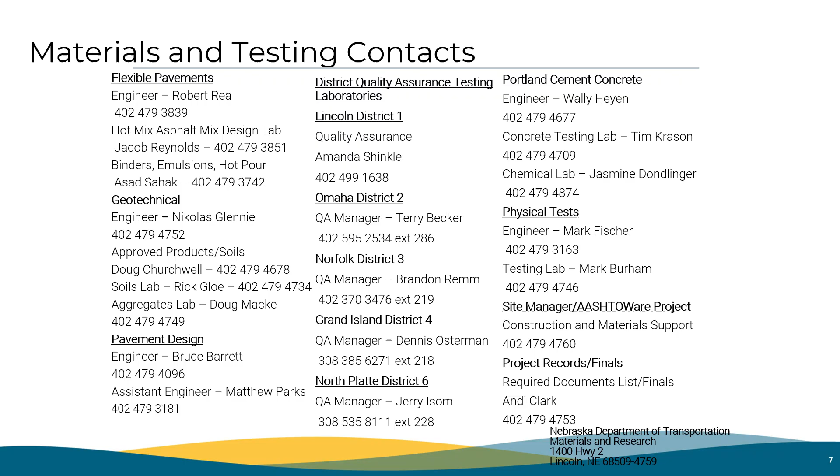Upon successful completion, you will receive NDOT certifications for binder and emulsion sampling and the Asphalt Field Technician 1 and 2.

Let's begin the Module 1 training, Intro to Materials, Tests, and Sampling.

Here we will go over specifications, plans, special provisions, and their hierarchy, lists, manuals, and locations of other supporting documentation, sampling, custody of samples, and sample identification.

This slide shows a set of plans in the middle, the standard spec book to the left, and the project contract special provisions to the right.

The hierarchy of these documents: the special provisions overrule the plans and standard specs, and the plans overrule the standard spec. You will reference this often, and it is a must to define, as there are sections that overlap in each, and must dictate how the contract is administered and interpreted.

If you cannot clarify a question or discrepancy, discuss with your district management through your project manager, district construction engineer or assistant district construction engineer, district engineer, then the construction office.

Now let's take a quick look at a set of plans. This is the title sheet that gives all the project location information. This is the North Platte East project. On this sheet you will find the project number, control number, the index of sheets, and the limits of the project.

The next set of sheets in the plans are called the typical cross sections. Let me blow up one of these sections so you can see it better. This is where you will see the designed build of the roadway sections. You will find information such as pavement thickness, milling depth, lane widths, shoulder widths, and much other vital information.

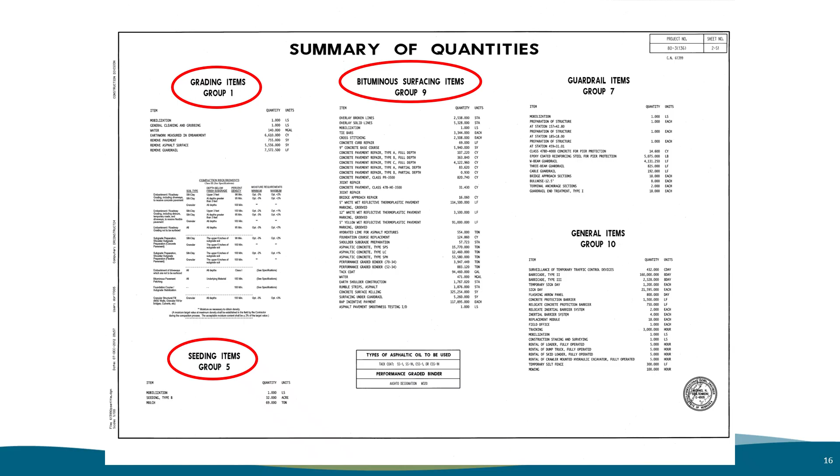The next sheet in the plan set is the summary of quantities. Each type of work has its own group. For example, you see Group 1's grading, Group 5 seeding, and Group 9 bituminous surfacing. This training focuses on Group 9 bituminous surfacing items.

Here you will find what type of mixes are needed for each project, how many tons are calculated for each type of mix, and how much binder and tonnage is estimated. In Module 6, we will further discuss how to keep track of the tonnage on the job site.

There are many other supporting documents that will support you during your project construction. Most can be found online or as a PDF that can be sent to you from the originating division.

So let's take a look at what you can find online. You simply need to go to the NDOT website that anyone can easily access, dot.nebraska.gov.

Here you can find standard specifications, material sampling guide, approved producers, approved products list, lettings, projects, rules and regulations, and lots more. So now I will show you how to get to the material sampling guide, or MSG.

In the upper right of the website, most of the manuals I showed you are found in the Business Center, circled in red. We have selected the Business Center. Now select the Materials selection from the drop-down menu.

You will then get this screen. On the middle left of the screen, select Materials Sampling Guide.

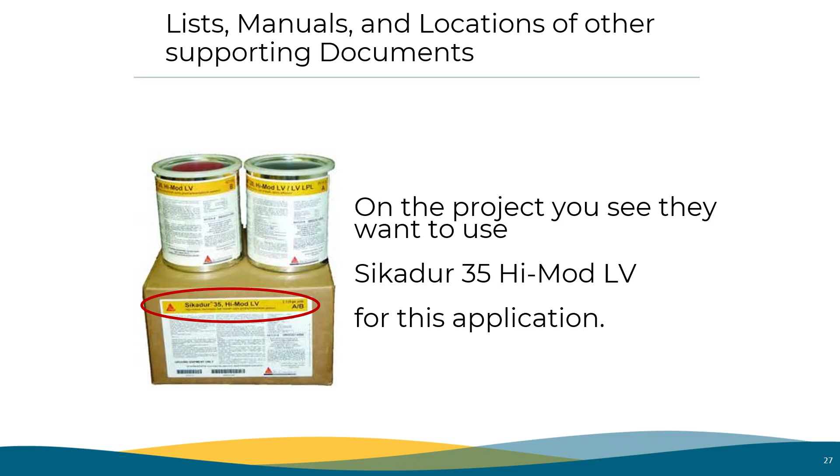Say for example that the plans call for a grade 1 epoxy, class B and C for the application. So you go out to the project and the contractor has this on the project, Sikadur 35 Hi-Mod LV, and wants to know if it is the correct material.

We need to go to the approved products list. On the materials screen, select the approved products list. And you end up on the APL screen like this.

Then click on this drop-down window. It will then open this window to choose the category. In this case, choose the concrete selection.

Select the material from the list. You will get this screen, then select the Epoxy Resin Bonding System Grade 1 from the list.

This will provide you a table with the list of the approved products. Go down the list and find the product that is approved for those applications. In this example, the contractor has the correct material for use.

Okay, now we're going to shift gears and take a larger overview of sampling, custody of samples, and sample identification for some of our most common materials such as soils, aggregates, asphalt, performance graded binders or PG binders, emulsions, Portland cement, asphalt and concrete pavement cores, steel, and precast components.

It is equally as important that we have accurate sampling methods to correctly represent the material's properties. The sample should be taken at frequencies and locations that most reliably represent the quality or physical attributes of the product.

When it comes to sampling, we like to say, bag, tag, and label. Bag: make sure that the sample is properly secured and in a proper container to ship. Tag: with the AASHTO sampler ID number. Label: properly label the sample and the ID with as much information as you can.

One more note, when it comes to sample custody, the rule is simple. Samples, once taken, always need to remain in the inspector's custody, period. Next, we are going to take a look at several material examples, how they are bagged, tagged, and labeled.

Here is an example of a canvas sample bag used to ship samples of aggregates and soils. Notice the filled out sample label attached to the sample. Here is a similar canvas bag designed for smaller 10-pound samples.

Here are some aggregate samples that contain a green security seal that is tracked and provides sample custody security. This is covered in more detail in your ACI concrete training courses.

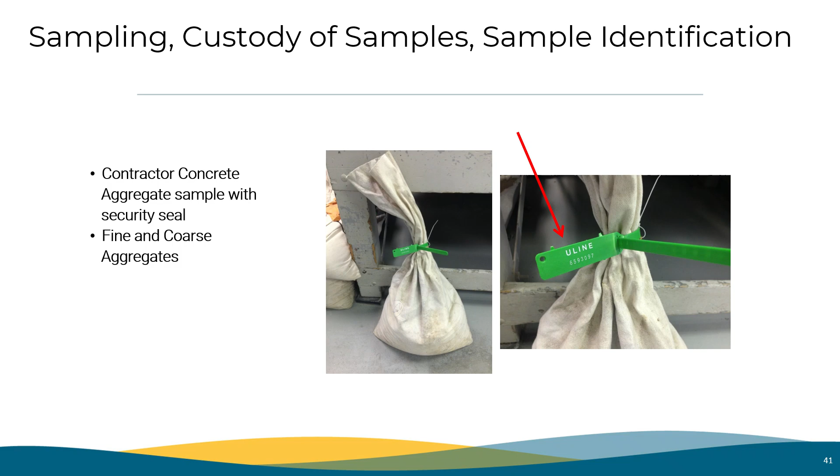This is a 1-quart plastic container used for sampling water-based materials. These are supplied by NDOT. Just contact your state project representative.

Here is a 2-quart metal sample container used for sampling PG binders. These are also supplied by NDOT. Just contact your state project representative.

Here is a sample of cement. These samples are placed in plastic, then secured in burlap or in a can to protect from moisture damage.

This is a cold feed aggregate sample. This sample was obtained in a Ziploc bag.

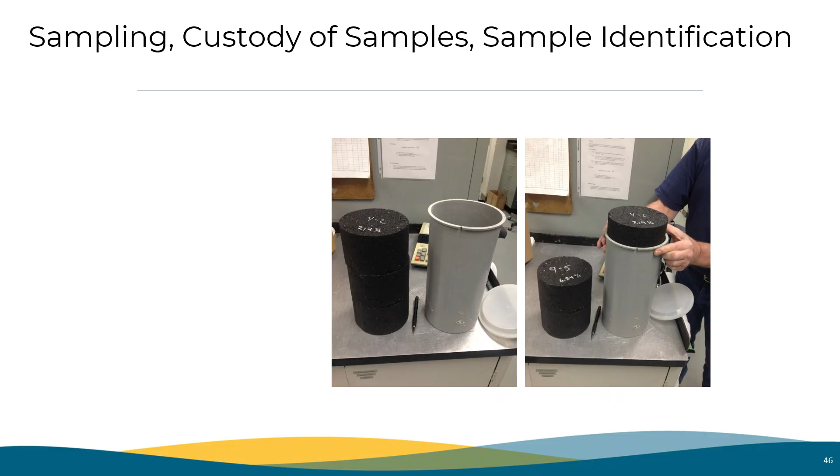These are 6-inch concrete cylinders that are used to ship TSR samples to the Lincoln Central Lab. You will be learning more about this later.

Here is a roadway density core. Notice the paint and the identification on the top of the core. You will learn why this is an important practice later in the training.

Here is a 5-gallon bucket. These are typically used for larger samples of powdered materials such as cement, lime dust, or fly ash.

This is a picture of the sample ID envelope and an example of the information on the ID card that is inside of the envelope.

Here's a sample of reinforcing steel. These are sampled by the heat number of which batch they were produced. The white papers on top are the certifications of material and sample heat number identifications.

Here's an example of some of the precast products that all require certifications: girders, pipe, piling, precast inlets, manholes, or boxes.

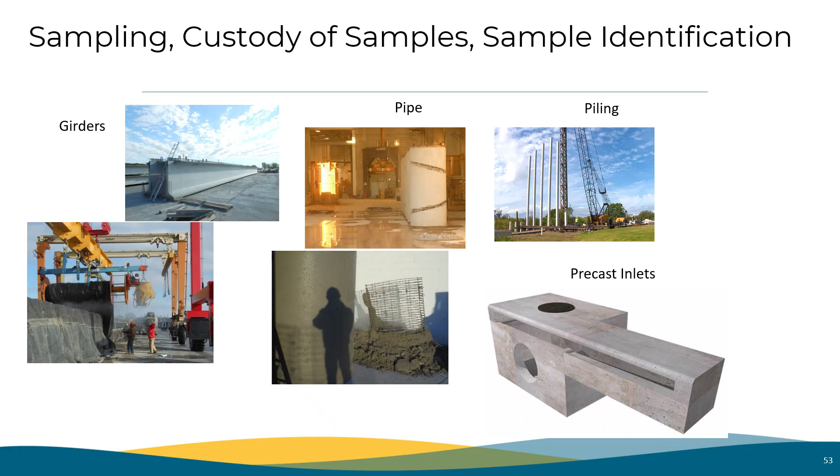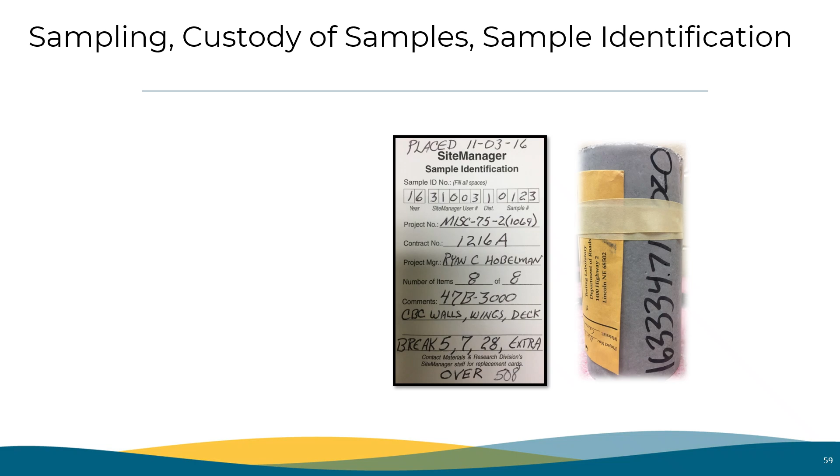Here's an example of sample IDs for concrete cylinders. Notice that it has both the sample ID and it is also written on the cylinder.

Okay, this is the last one. I think you get the idea of sampling, bagging, tagging, and labeling. The most important is the custody of samples. Samples, once taken, always need to remain in the inspector's custody, no exceptions.

While we are going over the examples of sampling, you heard me mention Site Manager or AASHTOWare, our project tracking and bookkeeping software. During this training, we do not cover this very important topic because it has its own training for you.

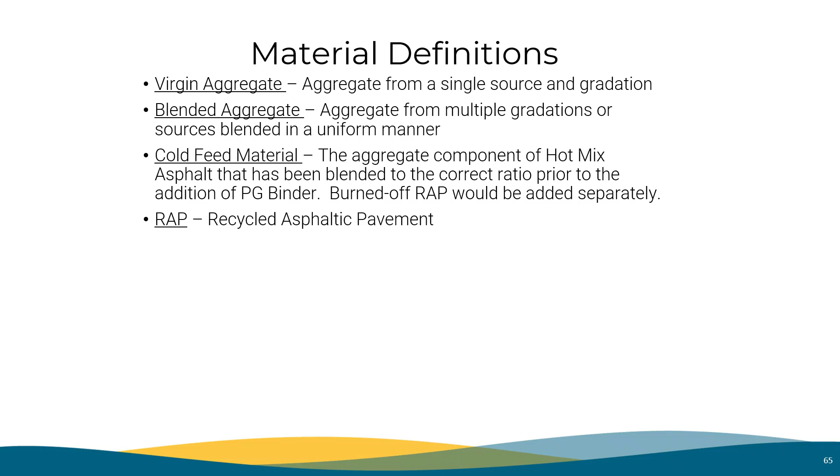Burned off RAP will be added separately. RAP is recycled asphaltic pavement. HMA or hot mix asphalt is the blend of aggregates, performance graded binder, and RAP used to make a flexible pavement, typically produced between 300 to 350 degrees Fahrenheit.

WMA or warm mix asphalt is when additives are blended to the HMA to allow for production at lower temperatures, between 225 degrees to 300 degrees Fahrenheit.

So what is asphalt? Hot mix asphalt is the blend of aggregates, performance graded binders, and RAP. It is typically produced between 300 to 350 degrees Fahrenheit. Next, you will watch a video on the production of asphalt.

We drive on asphalt roadways most every day. After all, 94% of U.S. roadways are surfaced with asphalt. You may have even seen asphalt being laid on a roadway. Truckloads of hot black asphalt mix are sent to the site to be laid down and compacted. But what is asphalt? What are the parts in that mix that produce a smooth, safe roadway surface to drive on? Let's take a look.

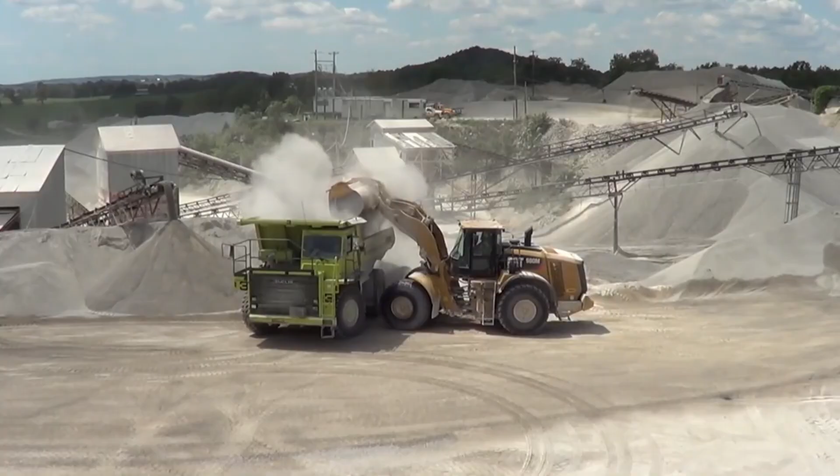A typical asphalt mix is made up of approximately 95% aggregates, meaning stone, sand, and reclaimed products. The type of stone can vary across the country depending on what type of stone is locally available to producers. The other 5% of the mix is the liquid asphalt glue. Asphalt is refined from the heavy components of crude oil and does not come from tar, which is a coal derivative. In the industry, it is known as binder, since it binds the mix together.

Here are some examples of different aggregate sizes that get used in asphalt mixes. These vary in diameter from 1.5 inches all the way down to a fine-grained sand and dust-sized particles.

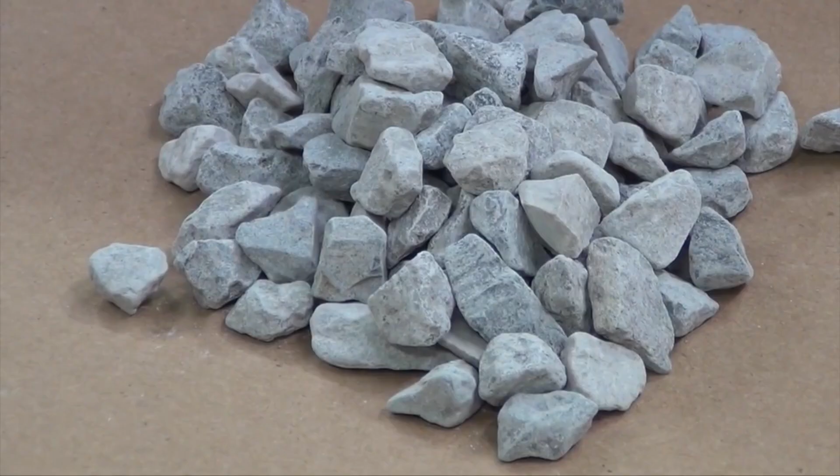Asphalt roads are designed for many different purposes. A small 2-lane rural road has a different recipe than a major interstate highway. So these aggregates are used in different quantities to meet the specifications for the desired roadway. A stiffer, less flexible pavement can be achieved by using larger aggregates and fewer fines, which creates more stone-to-stone contact. Using more fine aggregates allows for a more flexible pavement because individual stones are surrounded with more binder.

This is a core drilled from a roadway that shows a cross-section of the asphalt within. You can see a coarse mix of asphalt in the lower section, or base course, and a finer mix designed for the surface layer. This fine mix is less permeable and keeps water from penetrating down and causing cracks to form. In many states, specifications allow for the use of reclaimed asphalt pavement, or RAP, and recycled asphalt roofing shingles in the permitted asphalt mixes that get placed on roadways.

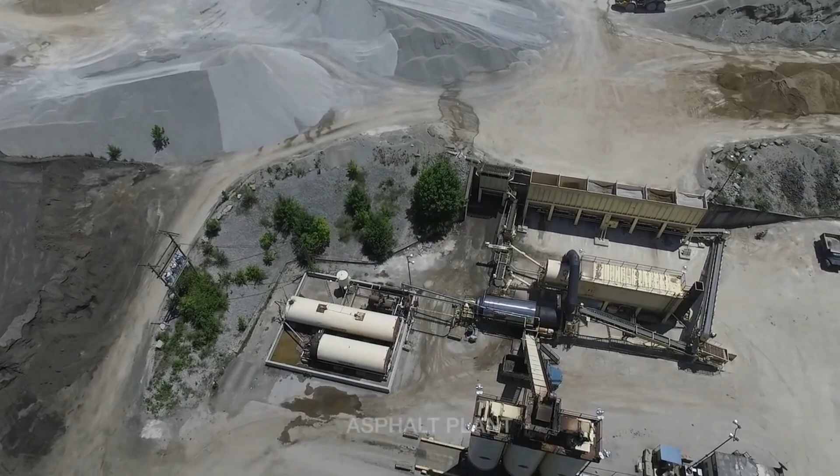100% of asphalt millings can be reused in new surfaces. This results in many millions of tons of recycled asphalt being used in the United States annually. It's actually the most recycled product in the country.

That brings us to the liquid asphalt binder itself. It only makes up 5% of the mix, but it is the glue that holds everything together. It is designed to be a strong, yet somewhat elastic adhesive. Polymers and other additives may be used to change its properties so that it behaves differently depending on roadway conditions. These ingredients are heated and mixed together to be placed on the roadway and roller compacted. Once cooled, the new asphalt road surface is ready to ride on in just minutes.

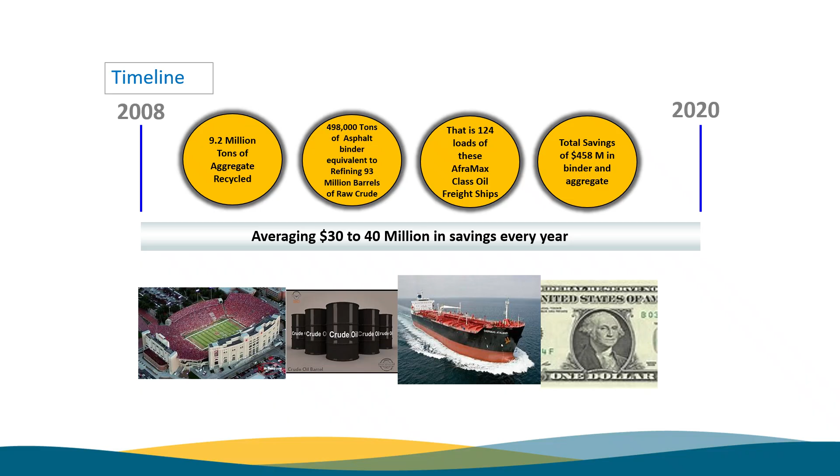Now you will see a video of a typical wash plant operation. In this video, we are looking at a gravel pit here in Nebraska. The aggregate from these pits are used for several applications for the department. They can be found along rivers across the state, and they operate at groundwater elevations. As the pit is dug out, it fills itself back up with groundwater. A tube goes down to the bottom of the pit and sucks up sand and gravel up to the pump house.

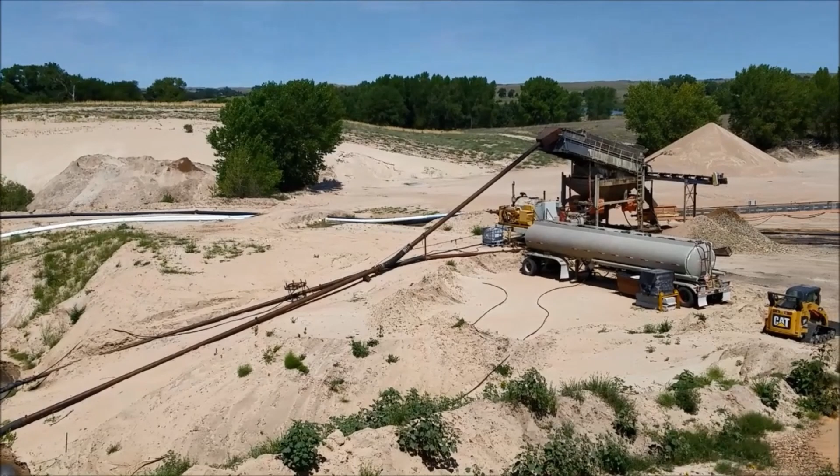It travels along this long pipe system until it gets to the screening plant. All of the aggregate enters the top of the plant and travels down the rotating drum. Inside the drum, the aggregate runs through a series of sieves that separate it by size. Everything sand particle sized and finer is put to the side and kept. Anything larger is returned to a discharge pile.

The desired aggregate is run down a series of conveyor belts to a radial stacker. This rotating stacker creates a stockpile, and as the pile reaches the top, it moves to create the next pile. As the camera rotates back to the plant, you can get a better view of the conveyor belts and the rotating drum.

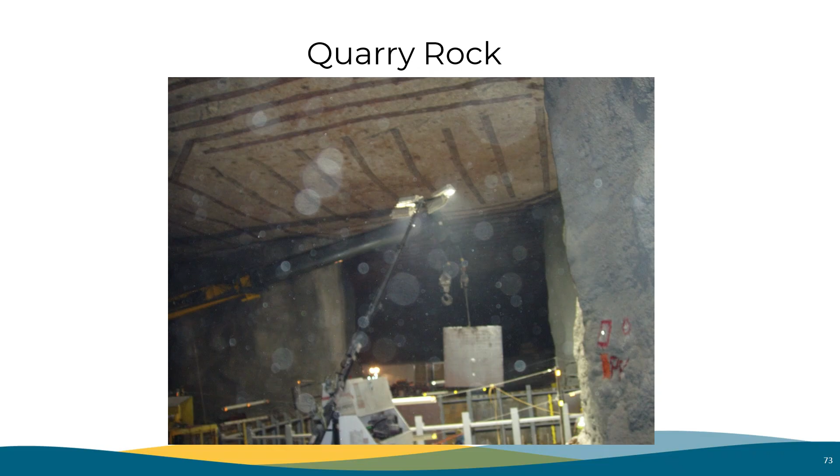This is a rock quarry, typically found in underground mines. There are 2 large mining operations in Nebraska, near Weeping Water and Fort Calhoun. This ledge rock aggregate is typically mined using explosives and sized through large crushers and screening operations. This is inside one of the mines here in Nebraska. You can see in this picture, metal strips are used to help stabilize the roof of the mine while working inside.

The aggregate has been produced. Now what? Let's talk about stockpiles and best management practices. It's imperative to keep stockpiles separate. Aggregates are typically piled into an arc to reduce segregation. Care shall be exercised to avoid segregation and degradation of aggregates or the inclusion of foreign material in the aggregates while the aggregates are being removed from the stockpiles. As written in the standard specification, each aggregate shall be stockpiled separately.

Hi, I'm Paul Del Rio from Packy. While driving down a smooth asphalt road, have you ever wondered just how that asphalt mix is produced? Behind me is an asphalt plant where stone, sand, and recycled products are combined with liquid asphalt to make an efficient pavement material. It all starts at the stockpiles.

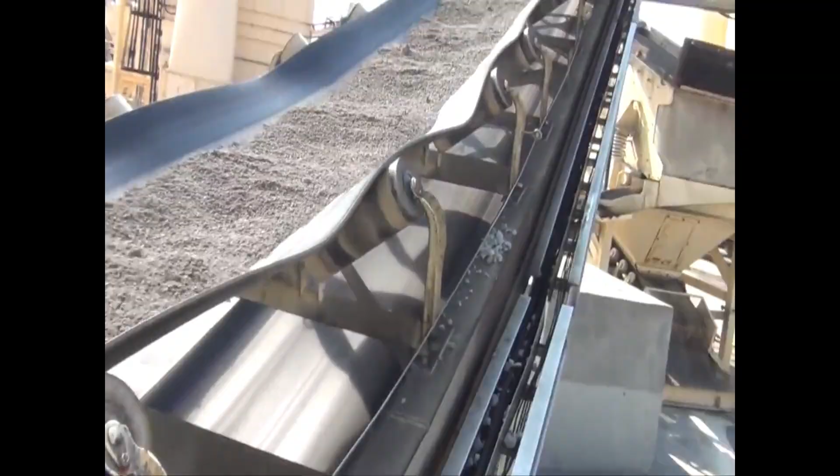Each pile consists of a different aggregate ranging from coarser stone down to finer sands. A loader operator hauls stone from the piles to cold feed bins. Each bin holds a different size aggregate. A conveyor running below the bins feeds aggregates into the asphalt plant. The plant operator, working in an on-site control room, can adjust how much of each aggregate size is used in the mix.

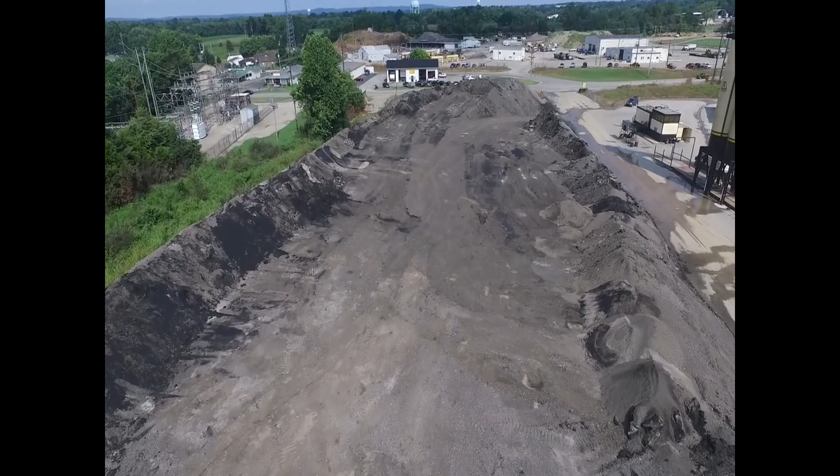Usually, the aggregate enters a large rotating drum with a gas-powered burner flame on one end. The aggregate is completely dried by the burner. Once that happens, liquid asphalt is pumped from the heated storage tanks and added to the drum, where the rotation mixes it with the aggregates. Reclaimed asphalt pavement, or RAP, can also be sent to the drum through a separate cold feed bin and conveyor. Using these recycled materials reduces cost and is friendlier to the environment.

A continuous plant, or drum plant, uses a drum to dry and also mix the liquid binder and aggregates together. It is the most common type of plant used in the United States. A batch plant also uses a drum to dry the aggregates, but then sends the dried material to a large batch tower, and then to a mixing chamber where the liquid binder and aggregates are combined.

Once the asphalt is mixed thoroughly and heated, it is sent up to storage silos. Some silos are only designed to hold material for a short period of time. Other silos are heated and can store mixes for several days. Some plants will use more silos depending upon the number of different mix types needed.

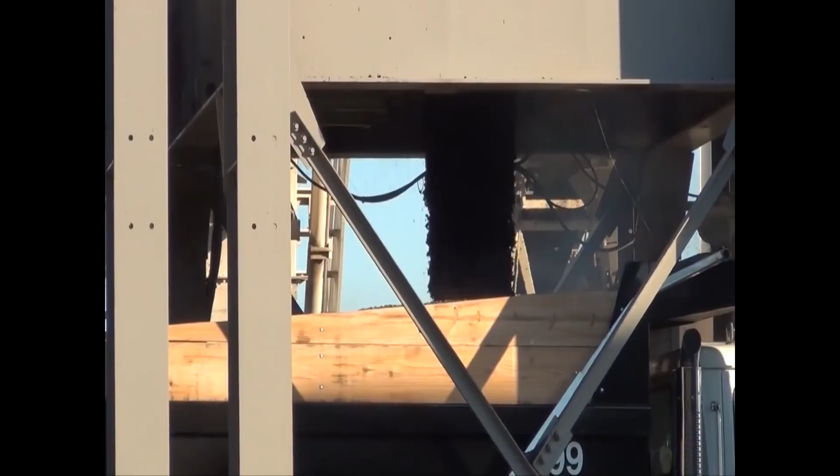Beneath the silos is the loading area. Dump trucks will receive material and then haul it to the paving site. A weight scale is usually located on the loading ramp in order to discharge the correct amount of mix for usage. Once the truck is loaded, the driver is given the signal to transport the asphalt mix to where it's needed for safe, smooth, and economical roadway construction.

Now let's look at the different types of plants typically used here in Nebraska. There are 3 types of drum plants used in Nebraska: parallel flow, counterflow, and double barrel flow.

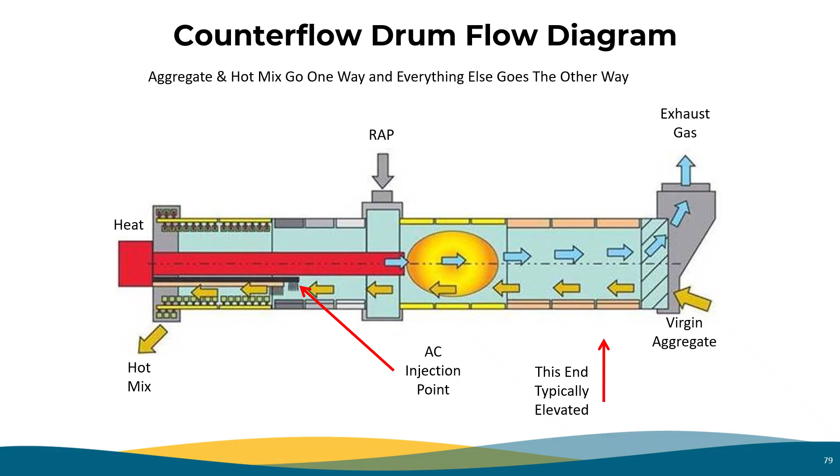The third type is a counterflow double barrel drum. We will show you in a video in the next slide. The Astec Double Barrel is a counterflow dryer and a continuous mixer section designed to perform efficient drying followed by thorough mixing.

The inner drum is constructed of a large rolled metal plate forming a long cylinder. Formed metal flights attached to the internal surface of the drum prepare aggregates to be mixed with other ingredients required in the mix. Two solid steel tires are attached to the rotating inner drum by means of leaf spring-type spokes. Four trunnions with extra-large railroad car-type bearings support the drum, and two thrust rollers keep the drum in place.

Virgin aggregate in correct proportions enters the inner drum through a gravity chute outfitted with a flop gate to restrict air entry. The inner drum contains three zones, with flights designed for a specific function.

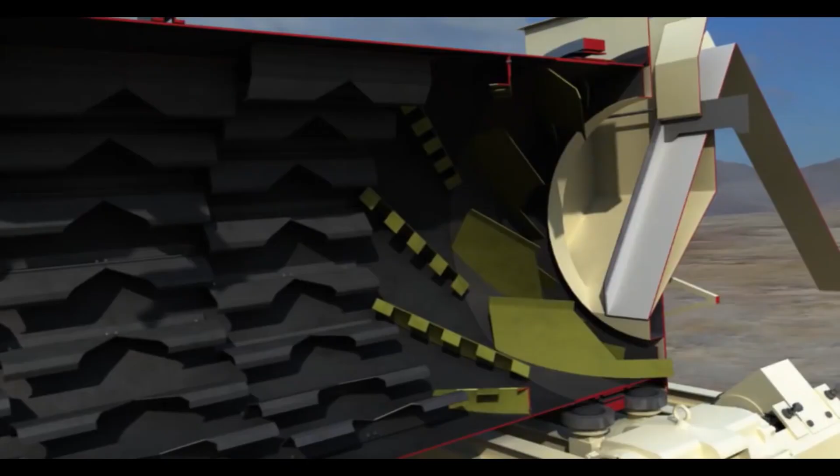Conditioning flights at the inlet end break up any clumps or sticky material. Showering or veiling flights lift and pour the material evenly through the hot gas stream, transferring heat to the cooler, moist aggregates. Material dams assure the showering flights are full to maximize heat transfer to the material veil.

Combustion zone flights prevent aggregate from impinging on the flame while spreading the material to maximize radiant heat transfer, as well as to protect the drum shell from damage that can occur from the high temperatures generated by the burner flame in this region.

Once heated and dried, the aggregate leaves the drying chamber and enters the insulated mixing chamber. At this point, an infrared sensor measures the temperature of the hot aggregate and sends data to the burner control for automatic adjustment of the burner output.

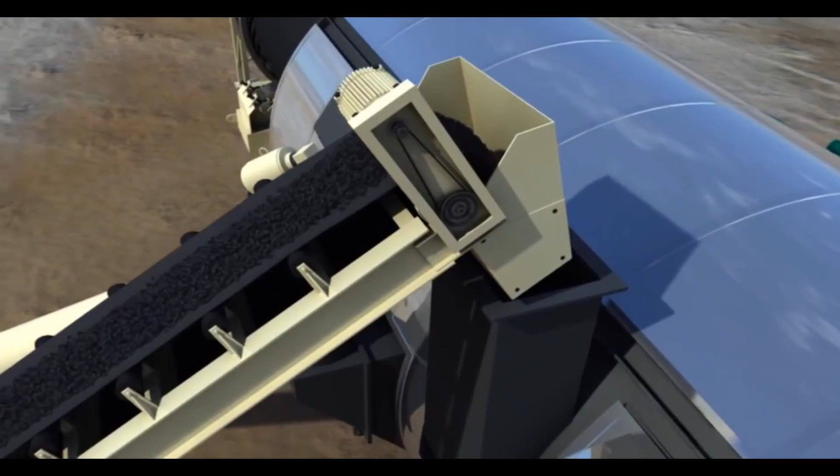The target temperature for the virgin aggregate will be adjusted relative to the volume of RAP that will be introduced to the outer drum. The hot aggregate transfers heat to the RAP in the outer chamber, driving off moisture as steam. This minimizes emissions because the RAP does not contact the hot gas stream in the dryer chamber.

The steam and blue smoke from the mixing chamber are pulled into the inner drum past the burner flame, where the hydrocarbons, or blue smoke, are incinerated. This results in a clear, odor-free stack. The only visible emissions are a steam plume on a cool day, even at 50% RAP.

An insulated outer shell promotes efficient use of otherwise fugitive heat from the drying section. The use of the conserved, recovered heat from the drying section of the drum translates into fuel savings.

The insulated outer drum provides a long mixing chamber where mix ingredients are added to the hot, dry aggregate in an order that allows better temperature equalization and more even distribution of all particles throughout the mix.

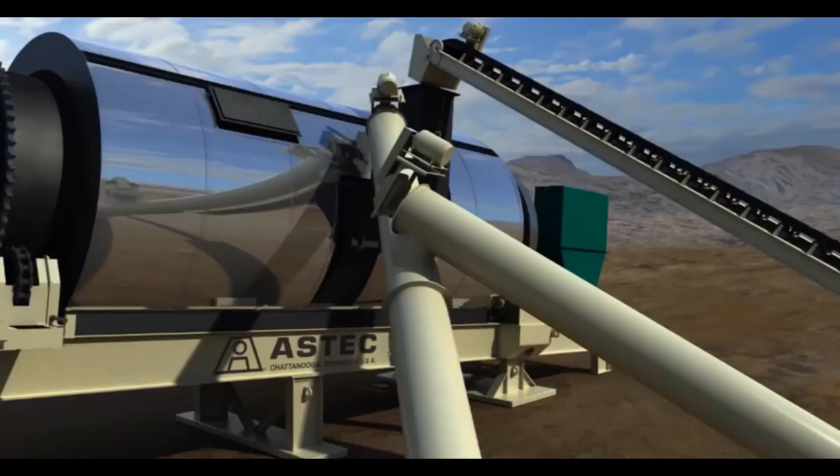The double barrel utilizes a sequential mixing order. First, hydrated lime is added when required by spec or mix design, followed by recycled asphalt pavement, known as RAP. Then liquid asphalt cement, or AC, baghouse fines, and finally, dry additives.

The mixing chamber includes rows of mixing paddles mounted on the outside of the rotating dryer drum. These paddles ensure thorough coating of the aggregate. Ni-Hard paddles mounted to the outer surface of the drum convey and mix the heated aggregate with RAP, AC, and dust. Ni-Hard belly liners provide a wear-resistant surface for the mix to slide across as it travels through the mixing chamber to the discharge chute.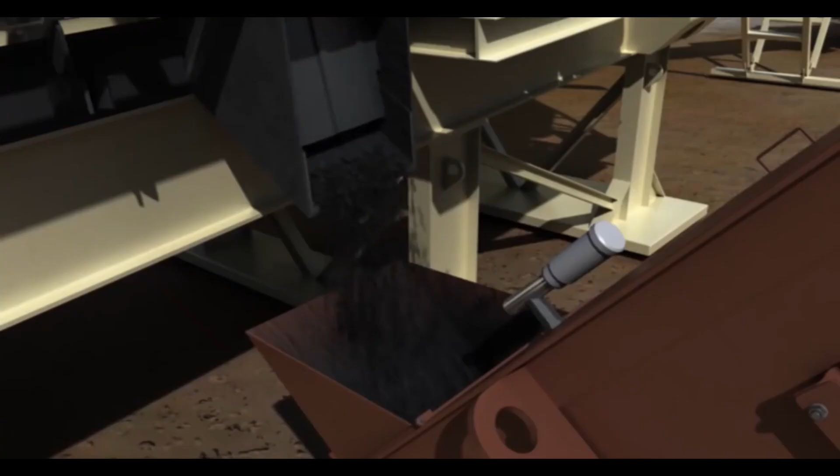The paddles convey the mix to a sweep-type discharge chute, where it enters a drag conveyor or bucket elevator for transfer to a surge bin or storage silo. The discharge chute includes a weighted flop gate to limit air entry. A temperature sensor at the discharge point signals the mix temperature to the control system.

Combustion flights are flat and close to the outer shell. Material moves under the burner flame using combustion flights. As a result, the material is heated but does not make direct contact with the flame.

Drying flights remove moisture from the material. Heating flights: once the moisture is removed from the material, it can be heated to the desired temperature. Mixing flights help with the material handling and flow within the dryer to ensure integration of the material. Discharge flights, finally, move the material out of the dryer.

These can vary in shape depending on the location of the discharge, but often are flat and run parallel with the dryer.

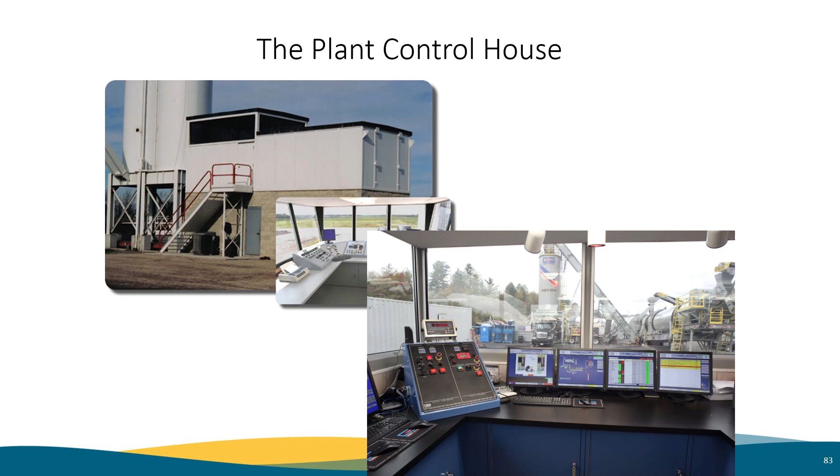They typically have screens that look like this, as written in the standard specifications. Continuous temperature and time readings shall be electronically recorded whenever the plant is operated. Locations include discharge chute, inside the surge bin every 2 hours, and inside the PG binder storage tank every 2 hours.

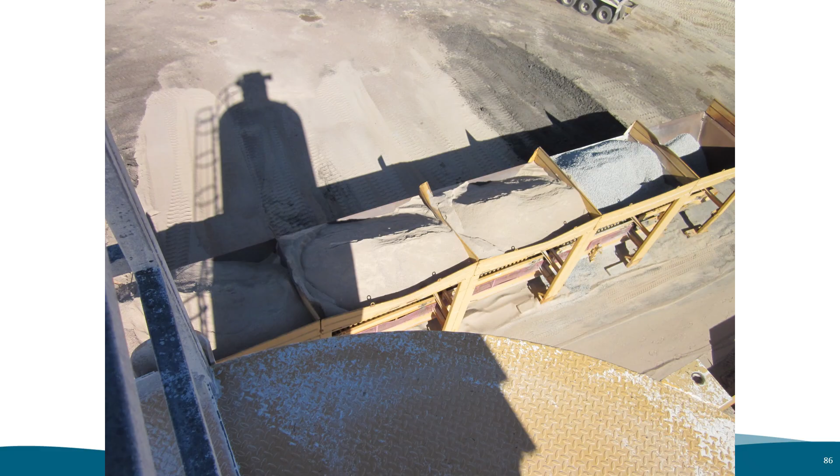This is a top view of the cold feed aggregate bins, showing the different material in each. You do not want the aggregate to overflow from one bin to the next. Make sure the plant loader operator is not overfilling the bins.

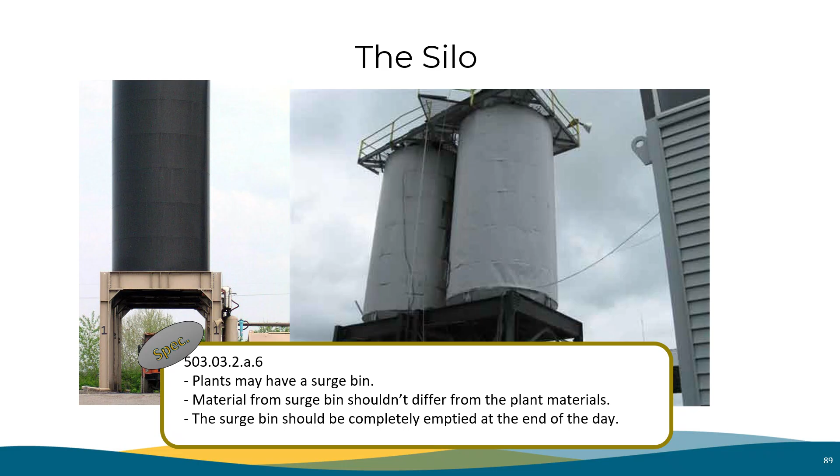Next you will see a video of loading a truck at the discharge hopper. It usually takes 3 weighted material discharges to fill a belly dump truck like the one shown.

Contractors are delivering the hot mix to the paver, and on the return trip they are hauling back millings. This makes it harder to keep truck beds clean.

As written in the standard specifications, truck beds or other equipment with which the bituminous mixture comes in contact may only be cleaned with products approved from the department's approved products list. Diesel fuel may be used as a cleaning solvent only at the end of each workday, to avoid contaminating the asphaltic materials. Diesel fuel shall be used in accordance with all applicable environmental laws and regulations.

It is also written that the truck bed shall be clean and shall be constructed so that all material remain in the bed while the truck is in transit. Now you will see an overview of a plant operation in Nebraska.

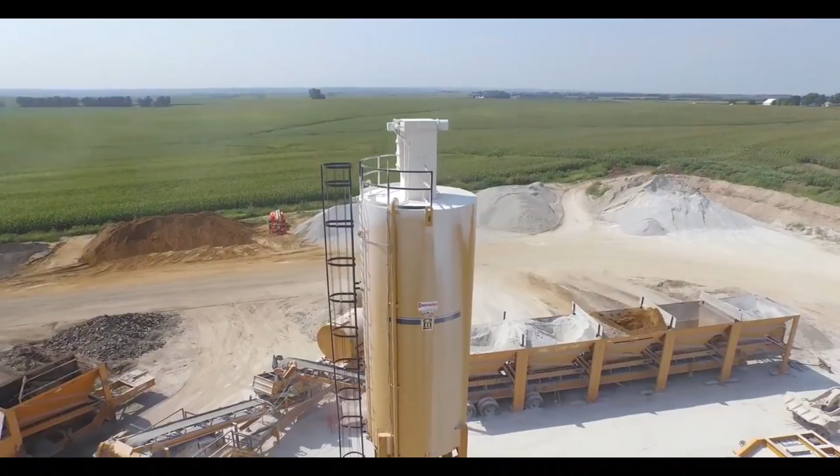There are 5 types of mixes used: SPR, high RAP mix; SRM, special reclamation mix; SPS, shoulder mix; LC, leveling course; and SLX, thin lift and for regular use overlays. First, we will discuss SPR.

SPR stands for Standard Paving Recycled Mix. It uses a high recycled mix, up to 55% RAP. It is used for low, medium to medium-high volume roadways. SPR accounts for approximately 60% of NDOT annual tonnage.

SPR usage has improved in-place density, increased joint density, has better rut resistance, and increased structural value.

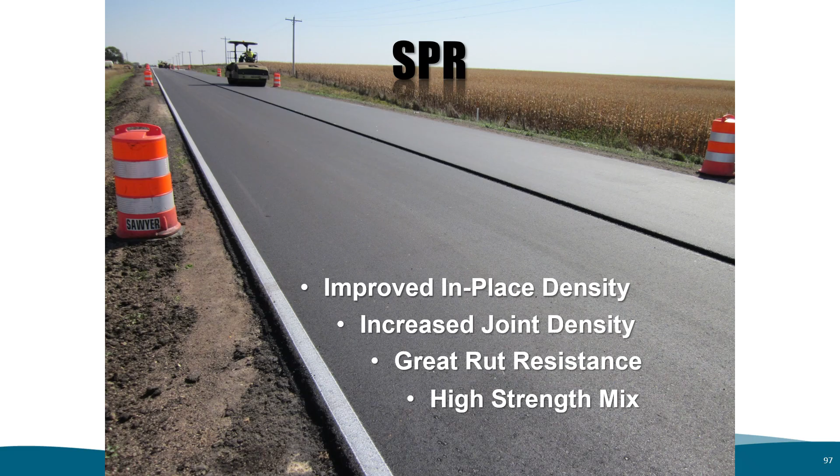SRM is a mix used for deep depth milling and reclamation. It stands for Special Reclamation Mix. Used as a base mix in lieu of HLSS or cold foam. Typically, it's placed in 4 to 6 inch lifts. It has a coarse high-strength mix, utilizes 35 to 65% RAP, and 0.9% warm mix additives are required so that it can compact at lower temperatures.

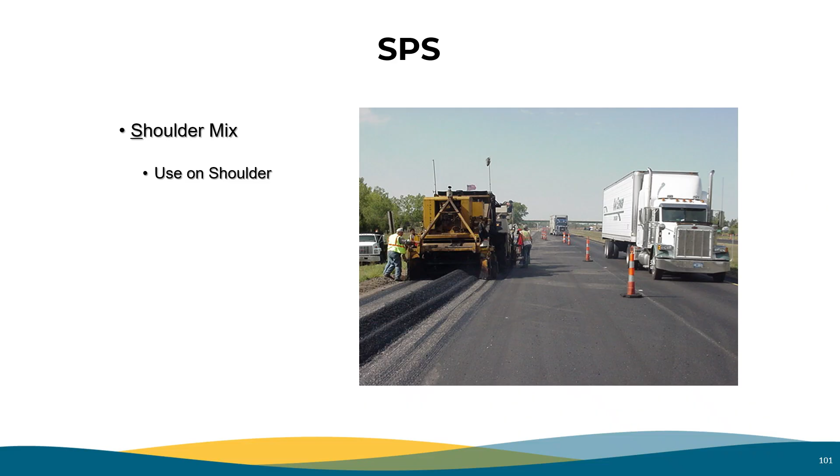Next, we will talk about SPS. SPS stands for Standard Paved Shoulder Mix. SPS is the mix used only on surfaced shoulders. The SPS mix is very economical, is designed to allow high RAP volumes with a max of 65%.

Now let's look at the type LC mix, which stands for leveling course. LC or leveling course mix has extremely fine gradation mix for very thin lifts of asphalt. LC can be placed less than 1 inch thick as a leveling course or scratch course. It has a higher binder content, helps prevent roller bumps, helps resist cracking, and this mix can use up to 35% RAP.

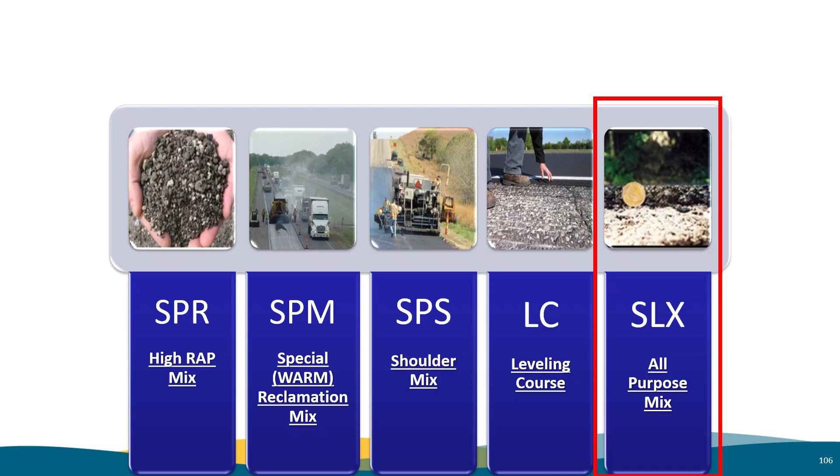And finally, let's look at the type SLX mix. SLX stands for Special Laminate Extreme Thin Mix. SLX can be placed as thin as 1 inch and up to 6 inches thick. Typically, it contains 20 to 35% processed RAP. SLX is our most versatile mix and is used in many applications. This is our most popular mix and represents about 40% of our mainline tonnage.

Now let's move into Module 3, where we will be covering laydown, paving, and compaction, including milling, surface prep, tack, delivery, material transfer vehicles, screed components, notched wedges, beveled edges, intersections and drives, and compaction processes and importance. Now let's go out on the road.

Milling, or sometimes referred to as cold milling, is the process of partial or full removal to a specific depth of asphalt surface. Most of the removed material can be processed and become recycled asphalt or RAP. Generally, the road is milled 1 to 4 inches as specified in the plans.

Next, I'm going to show you 3 short videos. The first one is showing you a milling machine making its first pass, milling half of the lane width. This is the milling operation. On this project, they're using a 7-foot mill to take out the centerline section, and then a second 7-foot mill to take out the outside edge. You're loading this into a belly dump truck. Occasionally, they'll also load into end dumps.

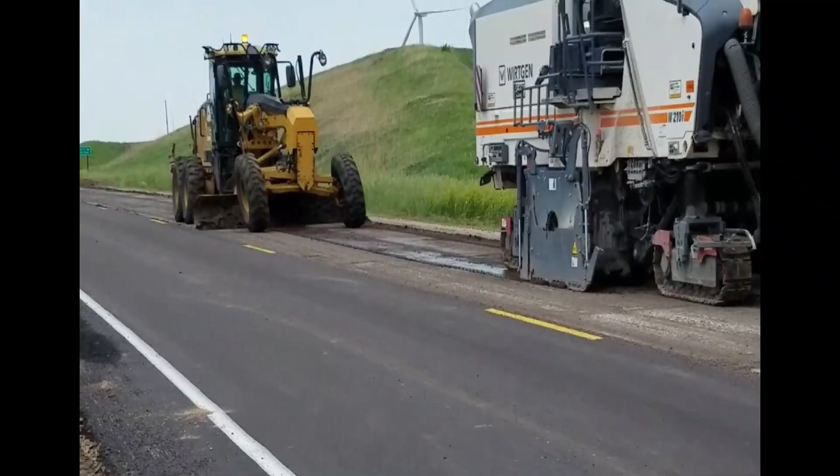And immediately behind the second mill, they have a motor grader working, who's scraping off any of the stuck material to the concrete. Part of the requirements of this job was to remove all the asphalt off the concrete. So the motor grader is getting anything that was still stuck the mills missed.

This last video shows the brooming and cleaning up after the milling operation. After the motor grader scrapes the pavement off and makes part of the trench cut, then the brooms come along and clean up the pavement, starting with the center line joint and working their way outward to move all the excess material out toward the ditch.

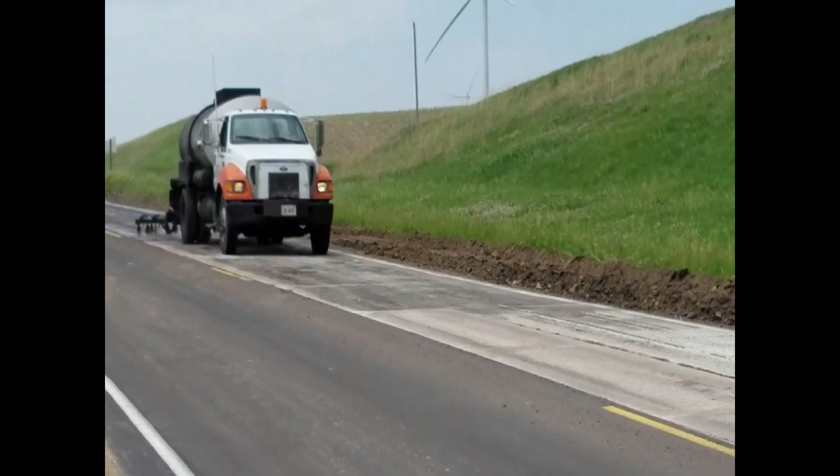Once the surface is milled and broomed clean, a tack coat is sprayed. Here are a couple short videos showing how the tack truck applies the tack, which is called an emulsion. It is basically half water, half oil, and emulsified together with soap to get the oil and water to blend. After the pavement is thoroughly cleaned, the tack truck shoots emulsion on the pavement, giving full coverage, so we get a nice surface for the asphalt pavement to adhere to.

In this instance, you can see he's got a couple of nozzles. They're starting to get plugged, and they need to adjust them. Here the tack truck shooting an extra shot of tack along center line joint to make sure we get good seal there and improve the coverage and help with the joint density.

After we do all this prep work and the tack is applied, we need to keep the project and paving surfaces clean. As written in the standard specifications, before placing the bituminous surfacing, the contractor shall clean the surface to be treated with mechanical brooms or hand tools as necessary to remove all vegetation, loose surface material, dirt, mud, old crack sealant, unsuitable bituminous or other deleterious material. Any surfacing material not securely bonded to the surface shall be removed. Material cleaned from the surface shall be swept to the sides or windrowed as required, and removed by the contractor at no additional cost.

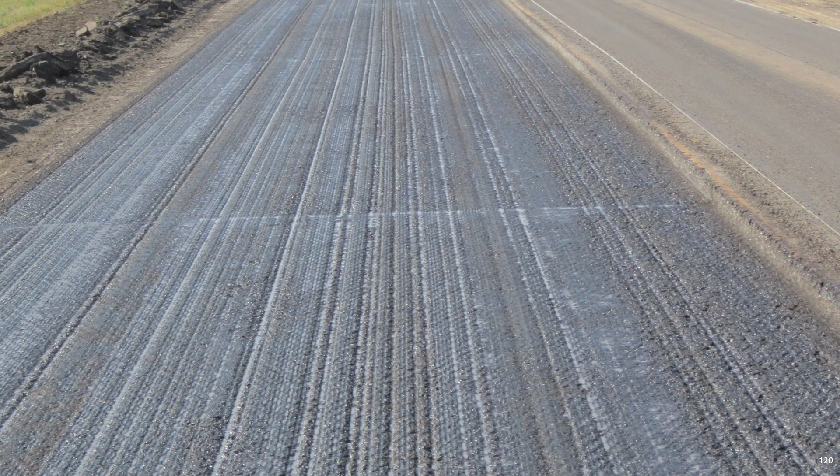When tack is sprayed on the roadway, it should be wet, shiny, and brown with full width lane coverage. After a short time, the tack will turn black. This is called broke. The surface will be dark in color with less sheen. The contractor will be ready to lay asphalt once the tack has broke.

As written in the standard specification, tack is applied after existing surfaces has been prepared and between each successive layer of asphaltic concrete. The tack will be applied in accordance with the requirements of Section 504. It is common for contractors to place tack far in advance, often a day ahead of laydown. This reduces waiting for the tack to break, increasing productivity.

Visually confirm that the tack is ready to go. Perhaps the tack will need to be fogged the next day due to tracking or wear. Fogging is when it's freshened up with a light spray of tack. Full lane coverage and a slight overspray of the lane width is necessary. Next, you will see a video of how contractors apply tack with a spray wand.

Tack should be sprayed 1 to 2 feet wider than the intended laydown surface as seen here. Also worth noticing, the truck is driving through the tack to deliver the load, lessening the tack coat with the truck tires, something to watch as a laydown inspector. This sometimes means a light fog or tack coat may be needed before proceeding with laydown of material.

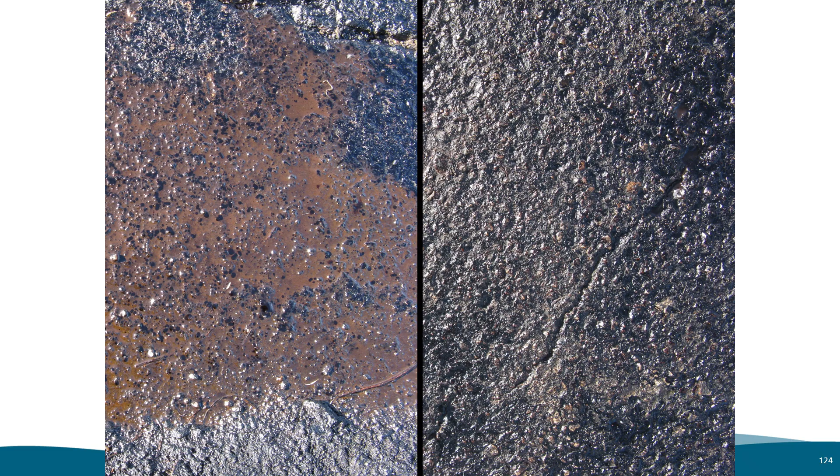In one of the earlier slides, I talked about the tack material breaking. The image on the left shows the tack that has not yet broke, and the image on the right shows tack that has broke. Notice the brown versus the black color.

Here the contractor has sprayed tack on the next laydown location. The surface is ready to go once all free moisture has evaporated or drained off the surface. As written in the standard specifications, asphaltic concrete shall not be placed over emulsified tack coat until the emulsion has broke and all free moisture has evaporated or drained off the surface.

This image of tack over Portland concrete pavement is showing tine marks and grooves. Trucks and traffic can pull out small fines, often leaving not enough tack coverage. The contractor's tack truck needs to apply a heavier application of tack to these surfaces.

As written in the standard specification, the rate of application shall be adequate to bond the new bituminous layer to the existing surface. This shall be from 0.10 to 0.20 gallons per square yard when applied to existing or milled surfaces, and from 0.05 to 0.10 gallons per square yard when applied to freshly laid asphaltic concrete.

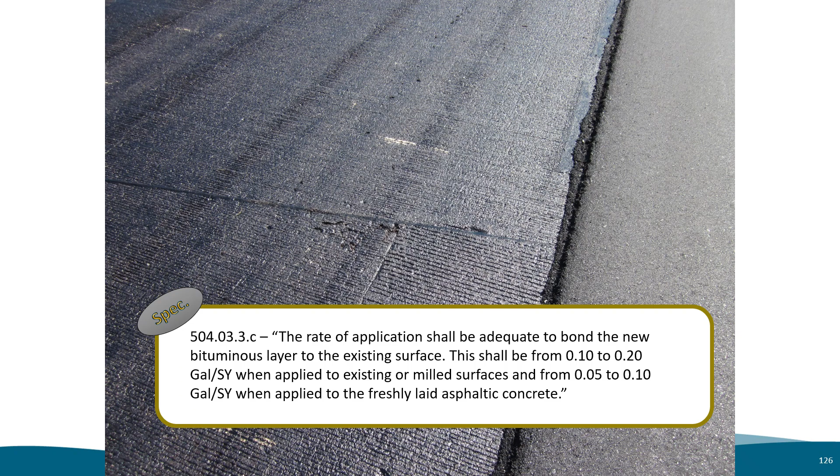The roadway is prepped. Now loads of asphalt are being delivered to the project. Not all projects are required to tarp their load depending on the haul times. During the cooler weather or during the longer haul times, the contractor's delivery trucks are mandated to use a tarp, no exclusions. As written in the standard specifications, all trucks shall be equipped with a suitable and waterproof cover. This doesn't mean that they have to be utilized, but must have accessibility so that the asphalt doesn't cool.

This is a material transfer vehicle, or better known as an MTV. As written in the standard specifications, material transfer vehicles are authorized. Before crossing any bridge, these vehicles must be unloaded to a weight approved by the NDOT Bridge Division. These units can be heavy. Care needs to be taken on structures, such as bridges, not to exceed the rated gross vehicle weight.

MTVs are important for transferring asphalt into the paver hopper for paving. MTVs can also help reduce segregation, bumps, and tack wear due to traffic.

Here is another MTV in the paving train. The discharge goes into the hopper where the state inspector is checking temperature. The MTV will pick up and deliver into the paver hopper, the last piece of machinery in the train. Behind the paver is the newly laid asphalt with rolling and compaction operations.

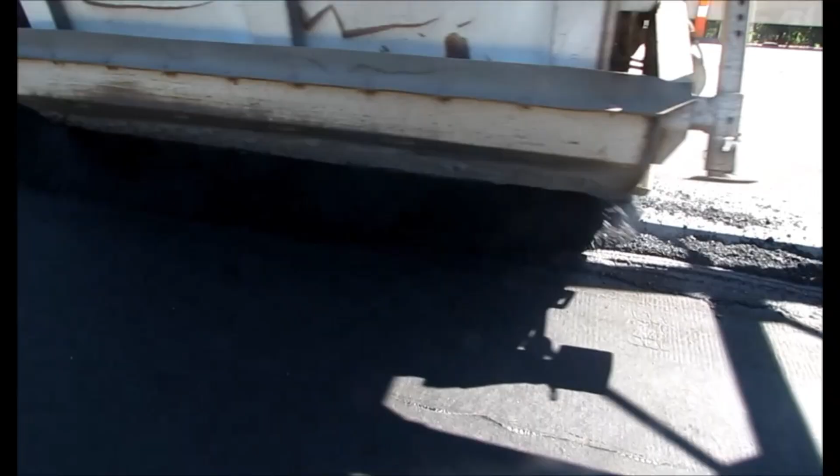In this video, we are looking at a standard pickup machine on a bridge membrane overlay. A pickup machine is directly hooked up to and is driven by the paver.

After the belly dump drops its asphalt load into a windrow, the pickup machine can load the asphalt into the paver. In front of the machine, you can see the side augers pushing the asphalt to the middle for the slat conveyor belt to pick up. The slats are offset from the ground to prevent scarring the bridge membrane.

The asphalt rides to the top of the conveyor and is dumped into the paver hopper.

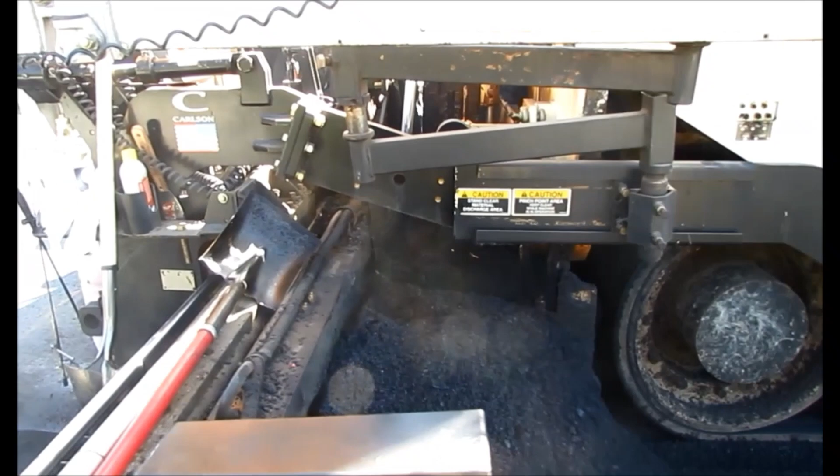The pickup machine also helps to evenly distribute heat more than having just the paver by itself.

This is a flowboy, or a live bottom trailer, pulled behind a semi. These trailers can haul about 25 tons of asphalt in a single load. The discharge is from the rear of the trailer. The asphalt will dump directly into the mobile transfer vehicle, or the hopper of the laydown machine. These trailers work well for placing asphalt in drives, intersections, and patching operations.

This is a belly dump delivery trailer. During this process, the hopper will discharge onto the surface of the road. Then the MTV will pick up the asphalt and place it into the hopper of the paver. This delivery system can create a temperature variation where the asphalt is hotter at the bottom of the load. The way the contractor discharges the load can help lessen the temperature variation.

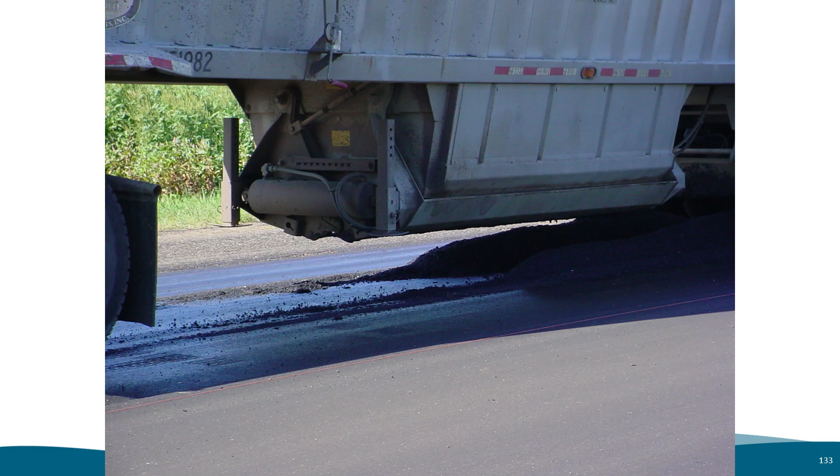Behind the paver, paving the 9-foot shoulders on new grade. The skid loader is cleaning up the roadway after the MTV picked up most of the material. There are always crumbs that they can't collect.

This image shows a belly dump being discharged onto the surface of the road being paved in front of the MTV. It's important to have enough trucks and asphalt production to have continuous laydown operations. This helps to lessen roadway bumps due to start and stop operations. As written in the standard specifications, the delivery of asphaltic concrete shall be scheduled to allow continuous laydown operations.

Now you will see 3 short videos with a belly dump. The first 2 videos will show how to pave a new shoulder on the roadway. The belly dump will place the windrow onto the middle of the lane, while the MTV picks up material and feeds it into the paver. The third video will show a typical mainline paving operation and normal procedures for a belly dump on the surface of roadway to be paved.

The bottom dump truck is dumping the windrow on the pavement. The MTV is loading the paver as they progress forward in tandem to collect more material and continue paving on this bottom lift of shoulder full depth construction on new grade. You can see the vertical edge of the existing concrete pavement has been tacked.

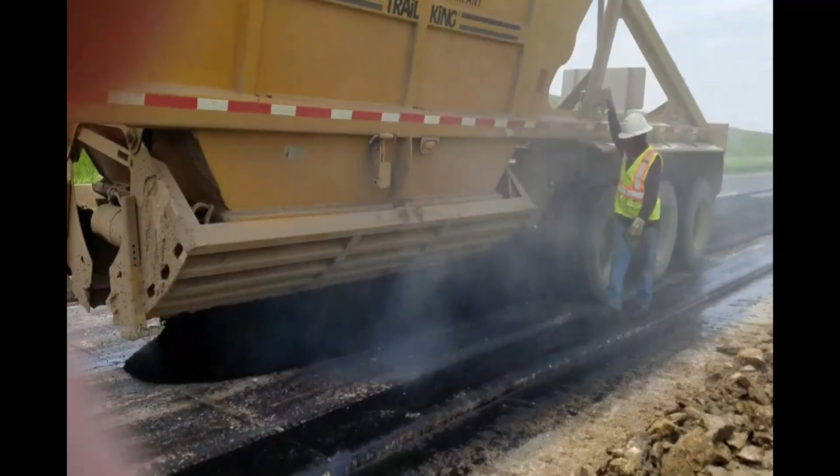Belly dump truck getting ready to unload in front of the paver. As the paver approaches, they'll start dumping the truck so the paving operation can keep moving. They always back the truck up over the previous windrow, so they're mixing new hot material with the older stuff that might be a little cooler. Dump just in time for the paver to approach, so the paver can keep moving.

Next, we will discuss the paver. The components of the screed include toe point, screed arm, screed depth crank, pivot point, screed plate, screed angle of attack, strike-off plate, and auger.

When the toe point rises, it will increase the depth under the screed plate. Doing this will increase the distance between the toe point and the screed plate.

A lack of material run through the auger process can leave a bump or dip in the finished asphalt surface. As written in the standard specifications, the paver shall be equipped with a distributing auger or other acceptable devices that will distribute the asphaltic concrete evenly across the entire screed width.

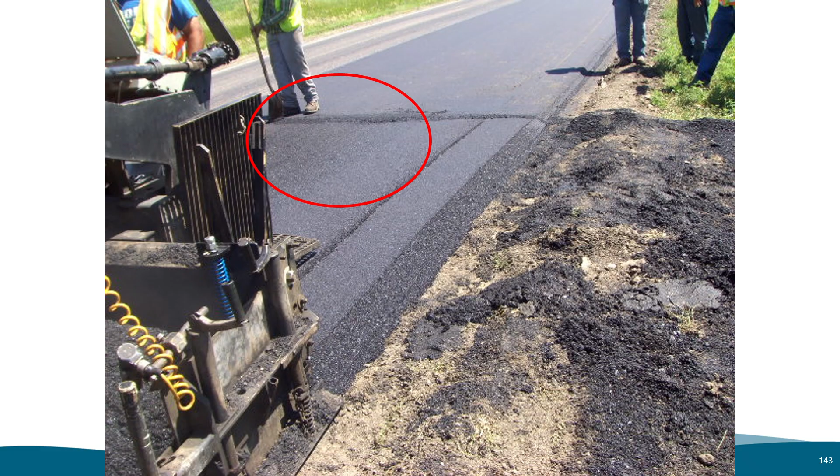Here you can see the change in asphalt that has been laid on the road. This occurred because they weren't up to the correct temperature on their screed heater. If this happens, they should stop for a few minutes to allow the screed to heat up to the appropriate temperature.

The reference system, also known as a ski, needs to be 30 foot or longer. It should be used near the center line of the roadway and shall be used to place all layers. The only two exceptions are for the final layer, which is done with a joint matching shoe, or for shoulder work.

Here are some important specifications about laydown that you will also need to know, as written in the standard specifications, placement operations. Asphaltic concrete used in constructions of sections having uniform width, including the surface layer of surfaced shoulders, and the surface layer of the intersections and driveways, shall be placed with a paver or finishing machine. The surface lift of asphalt shoulder shall be placed with a paver.

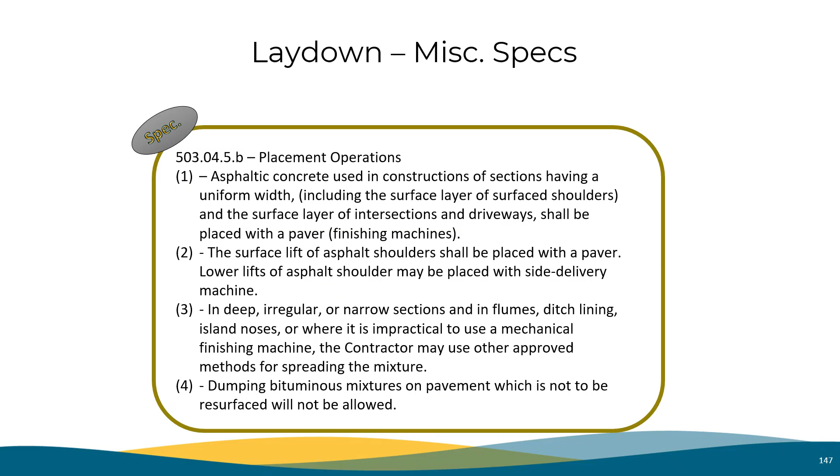Lower lifts of asphalt shoulder may be placed with a side delivery machine. In deep, irregular, or narrow sections and in flume, ditch lining, island noses, or where it is impractical to use a mechanical finishing machine, the contractor may use other approved methods for spreading the mixture. Dumping bituminous mixture on the pavement which is not to be resurfaced will not be allowed. Please note, top lift is always placed with a mechanical paver.

At the end of each day's paving, we must place a wedge to smooth out temporary transition, as written in the standard specifications. The roller shall pass over the unprotected end of the freshly placed mixture only when the placement of the layer is to be discontinued. When placement is discontinued, a wedge of asphaltic concrete, feathered 3 feet in length for each inch of layer thickness, shall be placed at the end of each lane.

At the end of each day's paving operation, if not at the end of each lane, the contractor will need to break bond with the tack. Use dirt, sand, paper, or plastic to break the bond. Do this so that later a motor grader or bobcat can be used to remove the header. Also remember that the slope coming off the headers should be feathered 3 foot for each inch of mat thickness. Inspectors should never leave when building a header until completion and confirmed safe for vehicle travel.

Here is another type of wedge. It is constructed along the center line. It is called a notched wedge joint. The notched wedge joint has a safety and production advantage over a standard joint. Contractors can continue paving without an edge drop-off. This also improves density and decreases permeability. With less water seeping through the joint, this type of joint improves long-term asphalt pavement performance.

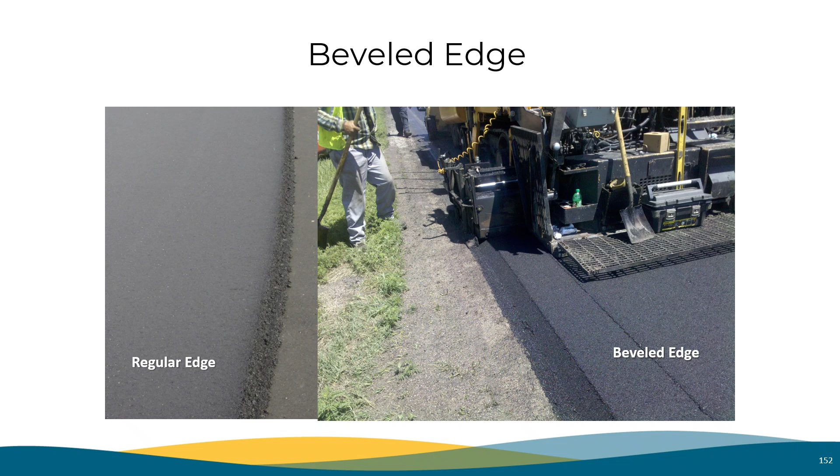This is another type of wedge. It is on the outside of the lane and is called a beveled edge. This provides a taper on the edge of the paving that has been shaped to 30 degrees. This provides a smoother transition on the outside of the pavement for the traveling public. If someone happens to have a tire go off the edge of the road, it is easier for them to return to their lane. This is how it is formed, using a shoe inside of the screed.

Here are some tips to remember when inspecting beveled edge paving. The rolling pattern should be watched closely to ensure there is a 30-degree shape. Compact once with a breakdown roller. Avoid contact near the top of the bevel during the intermediate rolling, and then complete the rolling with the finish roller. Next, you will see a video showing the paving of a beveled edge and the first pass with a breakdown roller.

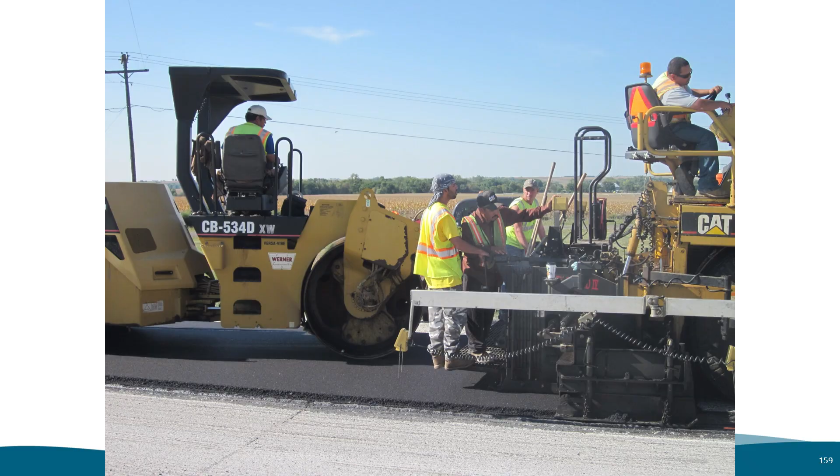In this next section, we will look at compaction. It is common to see the rollers this close behind the paver. Okay, maybe slightly too close, but it is necessary to optimize compaction. The roller needs to get on the asphalt when it is the hottest, right behind the paver.

This roller is the breakdown roller. It typically operates within 500 feet of the paver. It operates like it is somewhat connected to the paver with a string.

Here is a close-up photo showing the roller drum and the scrapers. As written in the standard specification, all roller wheels shall be smooth and free from defects that would mar the surface of the work. Adjustable spring scrapers shall be fitted to each roller to scrape in both directions. This picture also shows the drum scraper.

Be sure to check the condition of the rollers before use. Next, you will see a video showing the breakdown roller. Notice how it stays very close to the paver and makes long gradual sweeping turns, making sure not to tear the loose mat.

In this video, we are looking at a roller about to start its first pass on a cold morning. The asphalt is being placed on a milled concrete surface on a bridge approach section, moving away from the bridge. The paver's screed was set to 0 and gradually opened up to the design height as it moved away from the starting point. The roller must start making its first pass quickly due to the thin asphalt layer and cold temperature, causing the asphalt to cool.

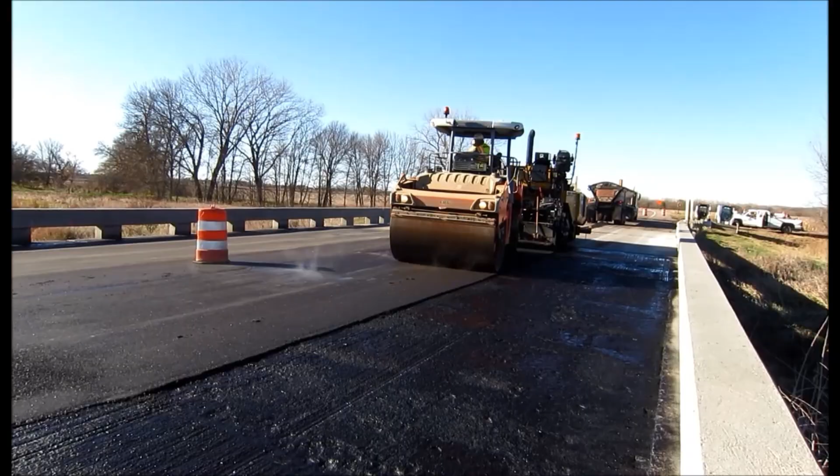In the second half of this video, we see another roller completing a forward pass and then starting a return pass. It takes a gradual turn to prevent mat tearing. It also avoids coming within 6 inches of the outside of the lane.

Here is a close-up of the drum, looking at the vibratory part of the roller. Frequency is how fast the drum is vibrating. Amplitude is the measurement of how far you are driving the drum up and down the asphalt mat. Note, if the aggregate is breaking, the amplitude may be set too high. Generally, the contractor likes high amplitude for best results.

The manufacturer's recommendations shall be made available to the engineer 2 weeks prior to placement. As written in the standard specifications, the frequency and amplitude of the vibratory rollers shall be adjusted to the manufacturer's recommendation for thickness of layers being placed and the speed at which the roller is being operated.

Here is the exact way that a joint should be compacted. As written in the standard specifications, when paving adjacent to the previously placed lane, or when placing the top layer of surfacing adjacent to the existing pavement or curb, the first pass of the roller, with the full roller width, entirely on the freshly placed material, shall be kept approximately 6 inches from the existing facility. The final pass of the roller shall then be made over the remaining uncompacted 6-inch strip, tucking the material into the joint.

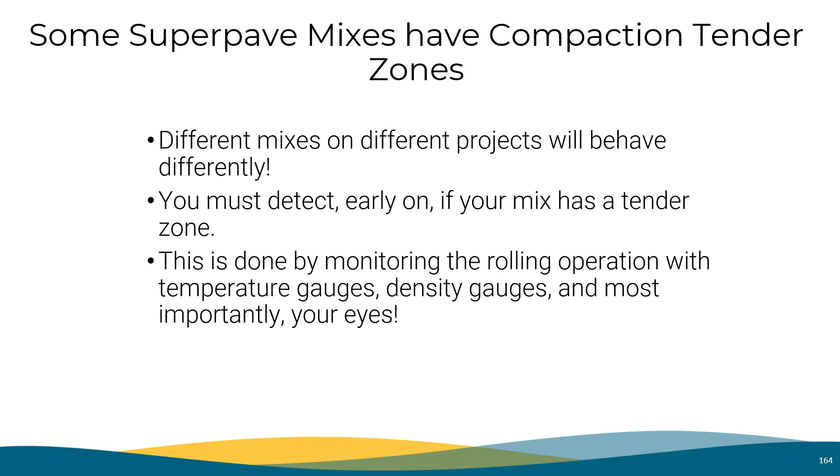And one last section I need to cover. This occurs maybe once or twice a year on a paving project. It is pretty rare, but is a possible issue that can happen. Some asphalt mixes have what we call a compaction tender zone. Different mixes on different projects will behave differently. You must detect early on if your mix has a tender zone. This is done by monitoring the rolling operation with temperature gauges, density gauges, and most importantly, your eyes.

Here's what basically happens. It's called material rollover. When going over existing joints, the mix will tend to catch on the joints or cracks and leave a bump. Once this occurs, it will worsen with each pass. This bump can also leave a tear in the mat.

There is a solution. The use of leveling course mixes can help with some of these problems. These mixes are known as type LC or SLX, also called scratch course. These are used for overlays on concrete or severely patched roadways.

Leveling course's most common application is for paving over concrete or pavement with heavily patched asphalt or composite pavement. A leveling course on these types of foundation can improve the smoothness of the completed roadway. It also helps keep cracks from being transmitted up from the foundation during the laydown.

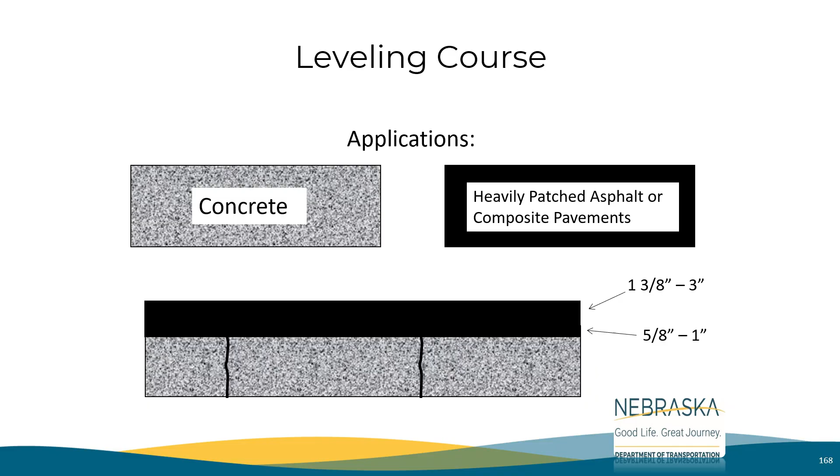You can also experience a longitudinal crack in the direction of the paving and rolling from over-rolling the tender zone. Mostly you will see this in the center of the lane. This is generally because the contractor didn't overlap the rolling. This can lead to poorly compacted sections of the pavement and ultimately poor pavement performance.

Also, with high compaction temperatures and too fast of a roller speed, transverse rippling and tearing can occur. Remember these three rolling times: breakdown rolling, intermediate rolling, and finish rolling.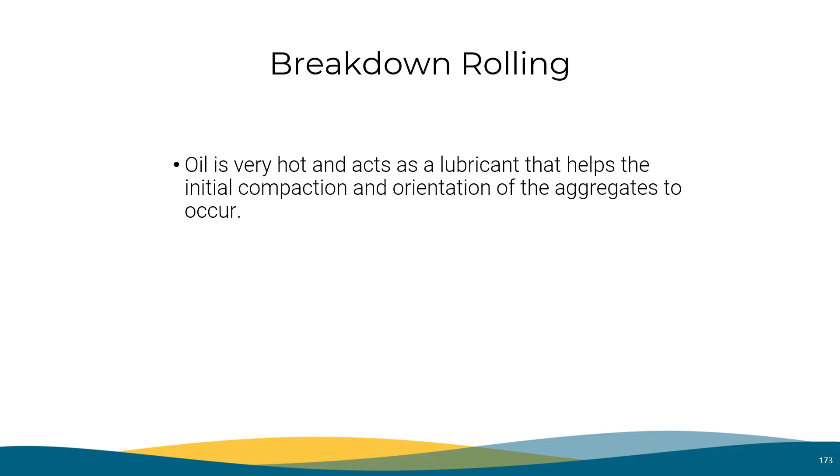During the breakdown rolling, the oil is still very hot and acts as a lubricant that helps the initial compaction and orientation of the aggregates to occur. This type of rolling is accomplished by always keeping a double steel drum roller right behind the paver.

During intermediate rolling, the oil is starting to cool and becomes more sticky. It can now hold the increased densification of the mat together. Double steel drum rollers, pneumatic rollers, or combination rollers are used during this stage.

During finish rolling, the oil is now almost solid. This is the stage when the roller marks are taken out without adding additional ones, and a slight increase in density is obtained. Double steel drum rollers or combination rollers are used during this stage.

Now let's take a look at a video that puts all of these operations together.

We've all driven on a smooth asphalt roadway, but just how is a quality asphalt mat constructed? It's made possible by a series of machines called a paving train. It requires a set of specialized equipment and a skilled crew to operate them.

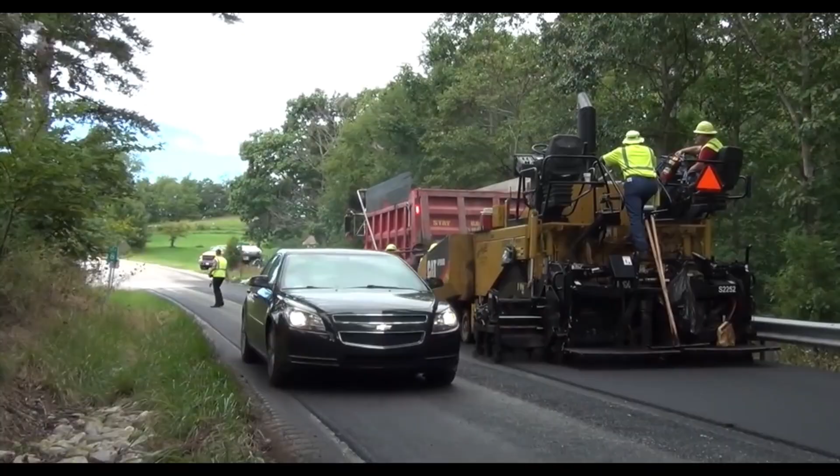Before paving begins, the underlying surface must be properly prepared. This may involve milling the old surface and sweeping away excess dust and debris. Applying a fresh tack coat layer helps create a tight bond between the new and existing pavements.

With the surface ready for new asphalt, the paving train can mobilize. This begins with dump trucks that haul the mix from the plant to the paving site. On larger paving jobs, the truck will sometimes dump the asphalt into a material transfer vehicle, or MTV, first.

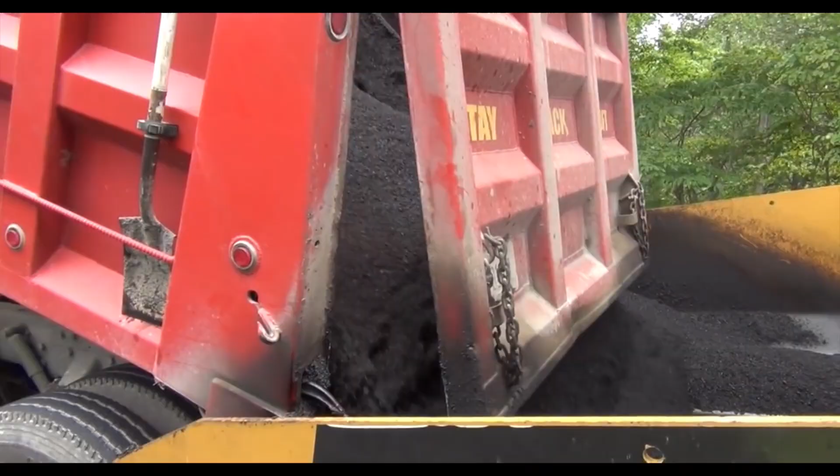This is useful for making the mix more uniform and allows the paver to operate more continuously, since it doesn't need to stop between truckloads. The MTV or dump truck unloads the mix directly into the paver. This is the machine that actually lays the finished asphalt surface onto the roadway.

A conveyor and augers are used to evenly distribute the asphalt mix before it exits the paver at the rear. The asphalt is applied to the roadway by the screed, which is a plate that can be adjusted up or down in order to produce the specified consistent pavement thickness.

As the paver applies the asphalt to the roadway, it maintains a constant speed in order to ensure a smooth road surface at the proper thickness. The screed also provides the initial compaction to the pavement.

A paver will typically need to make multiple passes in order to cover the entire roadway, depending on the number of lanes to be paved.

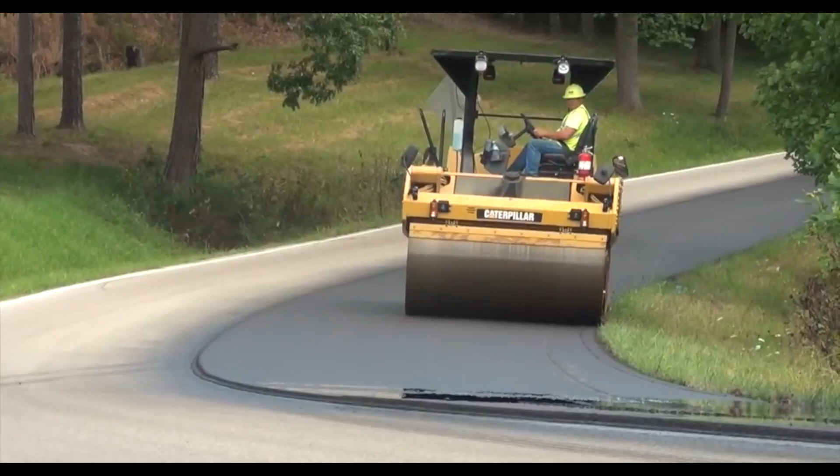Once the paver applies the asphalt to the roadway, the final step is to compact the material using rollers. The roller maneuvers in a specific pattern of passes to ensure that the entire surface of the mat is being compacted uniformly. After reaching target compaction, the roadway can receive traffic within the same day, all due to the efficiency of the asphalt paving train.